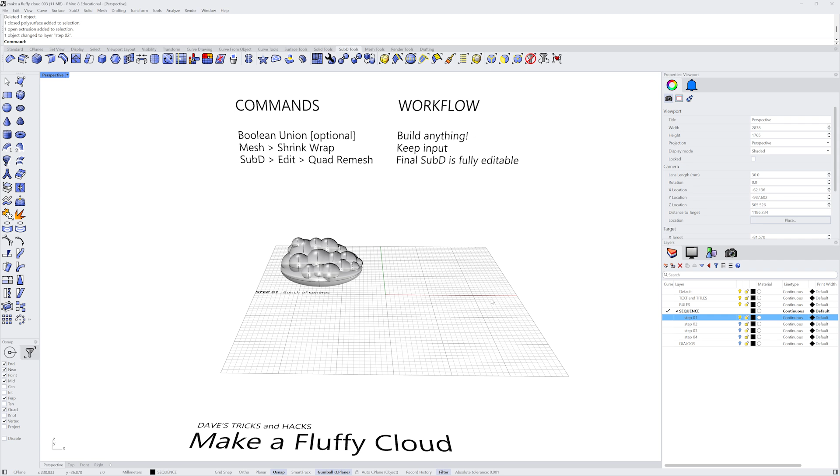All right, in Rhino, there is an important first step. So I'm going to zoom in onto step 1. And what I've created here is just a series of spheres. They're overlapping. Some have been scaled, some have been moved around. There's a giant flat one on the bottom. So I did this just to create a scaffolding, or it's like construction lines when you're doing 2D drawing. So we're just going to use this because it's quick and it's easy.

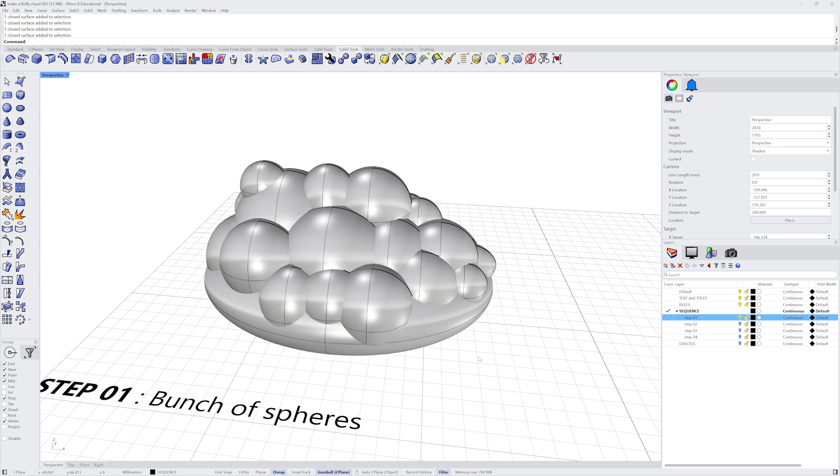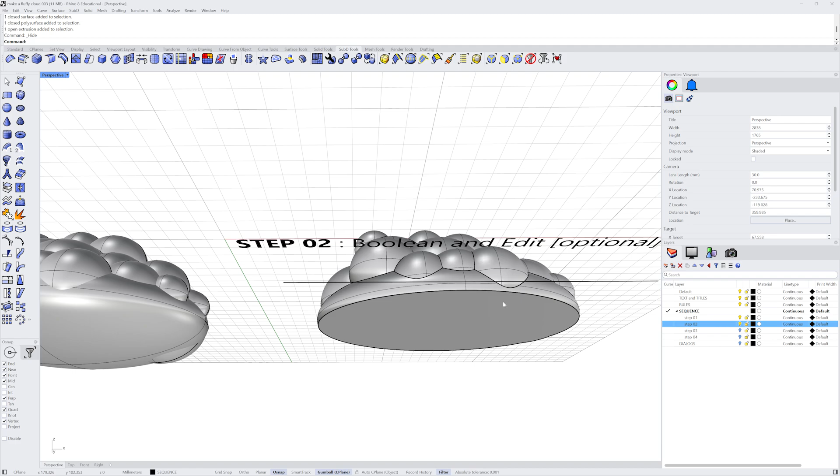So over on step 2, I also wanted to have it sliced off on the bottom. Therefore, this is an extra step, not required. I went ahead and booleaned, that's a Boolean union under the Solid menu, all of the spheres together and then sliced off the bottom. So if I just hide that, you can see there is kind of the remainder or the result of adding all these together. And if they're simple enough like this, you can probably just do it all in one single step.

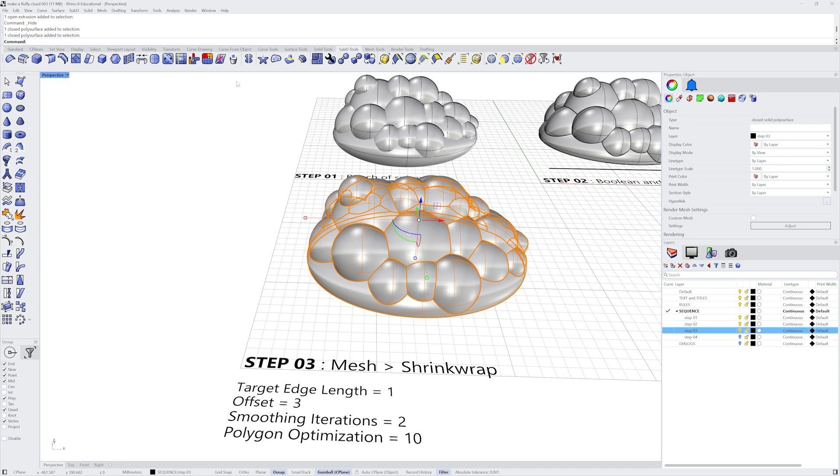All right, now we get to the good stuff. So step 3, here is the exact same closed polysurface. We're going to run the command called Mesh Shrinkwrap. I've got all the settings here. I've been experimenting quite a bit, and I will talk about which ones you should use or not use. So let's select the object here. I'm going to go up to the Mesh menu and select Shrinkwrap. Try to get everything in the screen here at the same time.

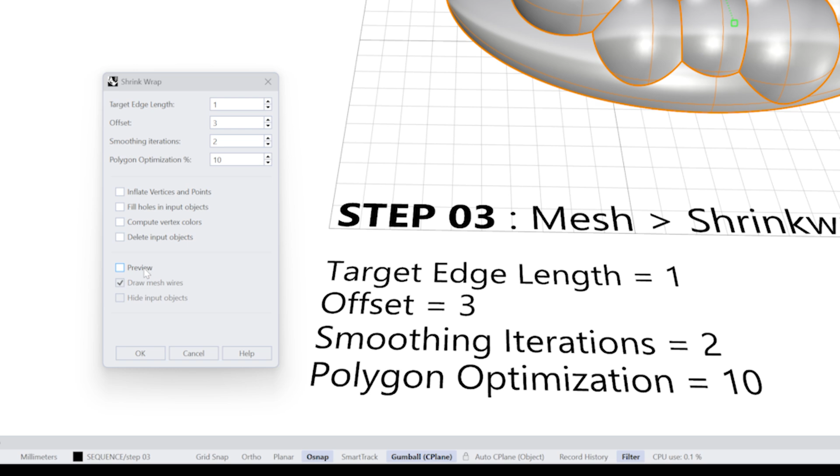All right. So I have found that the target edge length, remember, is the units in your file. Mine is millimeters. The offset is how much larger it's going to get. So that's a nice way to reduce some of those sharp creases. Remember, we want this to follow the basic form, but be a little bit smoother. So it's really important to take a look at the preview. So that's down here. And the result is, you can see, this is the 3mm offset where it gets a little bit bigger.

Now also, I've got only 2 smoothing iterations. The higher ones, I didn't notice a big difference. And the optimization I've kept fairly low. I want to capture all the detail because we have another command here to smooth it all out. Also, it's worth noting that this is not a quad. Instead, we have a series of 4-sided and 3-sided. So it's just a random mixture as the software needs. I'm going to go hit OK.

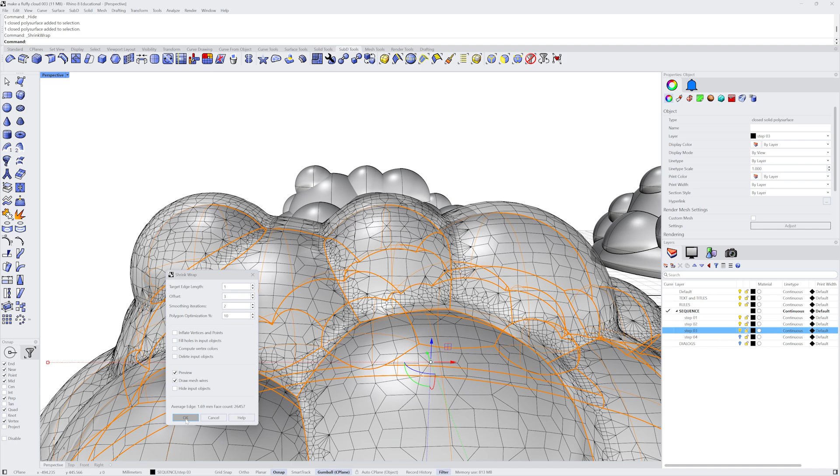And that's the result. It does look horribly complicated. A lot of times you may want to look at it with the rendered view to simplify it a bit. So that's looking quite a bit better. Let's go back to shaded view. And now the final step, step number 4, which is where we're going to run the Quad Remesh tool. That is going to turn this into a SubD object.

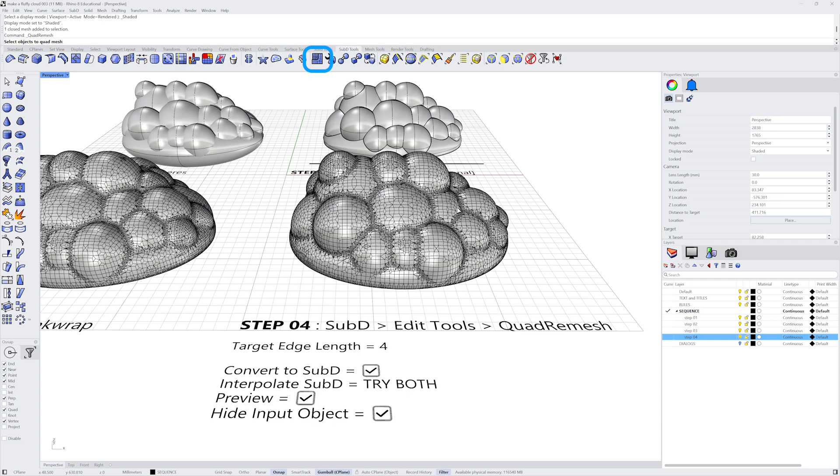Okay, we're going to select this mesh that we just created in step 3. We're going to go to SubD under the Edit Tools. And we're looking for Quad Remesh right there. It's also on the toolbar, and it looks like this. Okay, let me move this over. Now there's 2 basic ways to do the Quad Remesh. The default is way harder because you've got target count, adaptive size, and adaptive quad count. Forget that.

I'm just going to pick this one single variable, and then it's a lot more fun and interesting to experiment. I found that if I went to 4, again, that's file units, 4mm, I had some good results, but we also have to look around at some of these other options. Convert to SubD, yes. The interpolate, I actually experiment back and forth with that.

Now, the most important part of this whole operation is you definitely want to do the preview, which can be really confusing here. It takes a few seconds to generate. We've got these 2 things on top of each other. Kind of a mess. So just temporarily hide the input. Now we can see what we're about to generate with the Quad Remesh command. So that looks pretty darn smooth. So we got rid of a lot of the jaggies, and we've got kind of similar size quads everywhere.

So it could be a little bit simpler, but you might start to lose some of that definition. I definitely want to keep in these little joints in between some of the puffy parts. Oh, by the way, I said you could interpolate. There was not much of a difference between the 2 versions. So depending on your project, check both, then make the decision, then hit OK. The mesh is now back, which was only temporarily hidden, so we can go ahead and just maybe hide that or delete it.

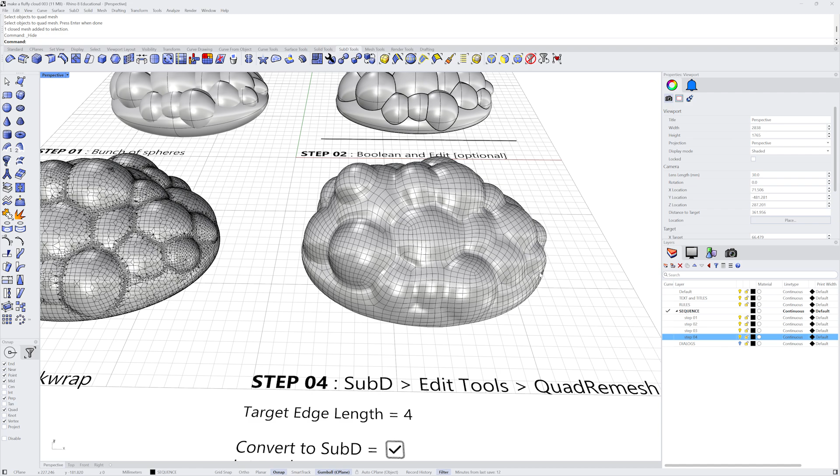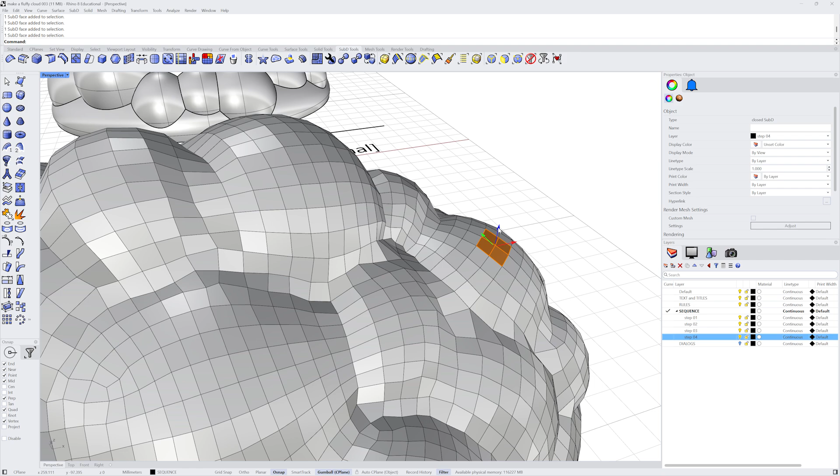And just want to remind you, this is now fully editable SubDs. We went straight from a NURBS to a mesh to a SubD. So it was a long way around, but it is amazing. There's no other way I have seen to do this. So again, we hit Tab and we go into box mode, and you can do any of the operations, like a little extrusion here, which I don't see any purpose in doing, but you could move or extrude stuff, and it's still pretty smooth because it's SubDs.

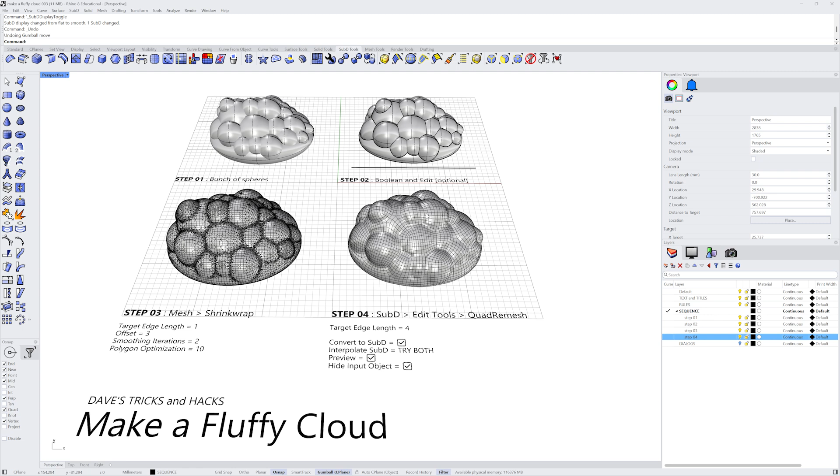So there you go. It's hopefully a very straightforward set of 4 steps, potentially 3 if you don't want to Boolean everything together. The mesh will still shrink wrap around unjoined objects, but I wanted to do the bottom slice. And then after the shrink wrap, you do the SubD Quad Remesh command, and it's amazing. There is no way you could ever build this from scratch. I've tried. So check this out, Shrinkwrap, Quad Remesh, now you know.